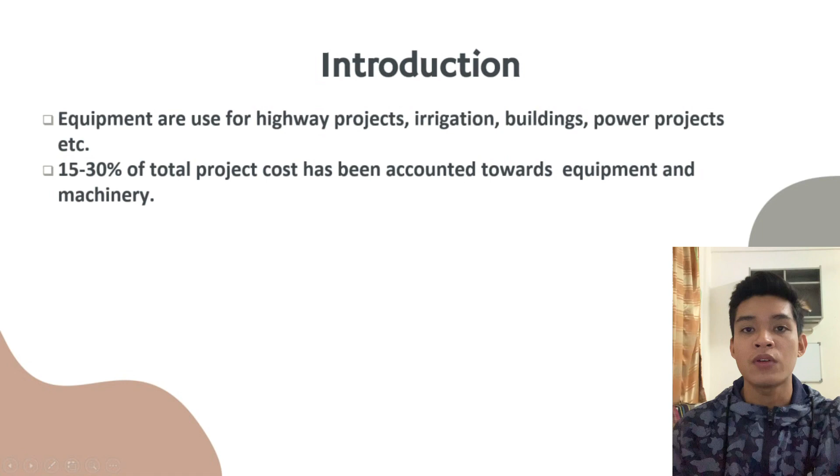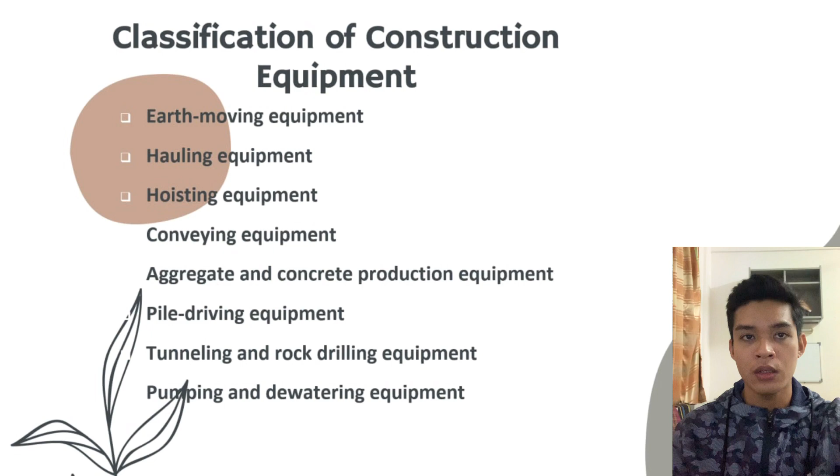It shows that the equipment used in construction must be sufficient and functional. The next slide is about the classification of construction equipment. There are several classifications that need to be focused on, such as earth moving equipment, hauling equipment, hoisting equipment, conveying equipment, aggregate and concrete production equipment, pile driving equipment, tunneling and rock drilling equipment, and pumping and dewatering equipment. All this equipment is very important in every construction.

There are some equipment that I will explain in more detail in the next slide. The first is earth compaction equipment. This equipment is also combined with sheep foot rollers.

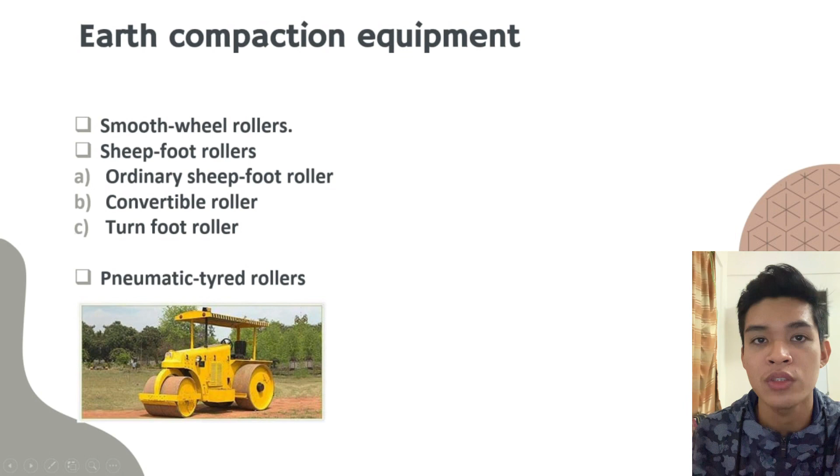Next is hauling equipment. The equipment used for transportation of material is known as hauling equipment, or simply haulers. Haulers may operate on the roadway and or railways. It also involves the transportation of building material, carriage and disposal of excavated earth, and haulage of heavy construction equipment.

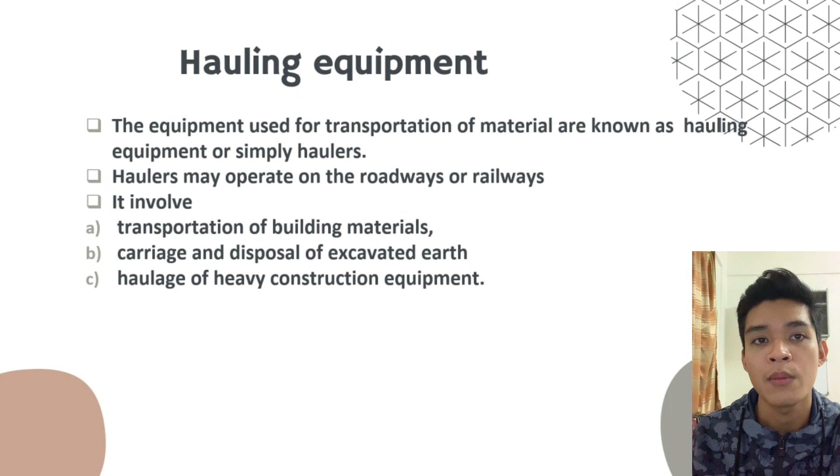Next is about hoisting equipment. Hoisting is the lifting of a load from one location and moving it to another location at a reasonable distance. This equipment is used in big projects such as construction of dams, industrial buildings, and more that require hoisting equipment.

This hoisting equipment includes jacks, winches, chain hoists, and cranes. A crane is the only single machine which, as a single piece, is capable of providing three-dimensional movement of a load.

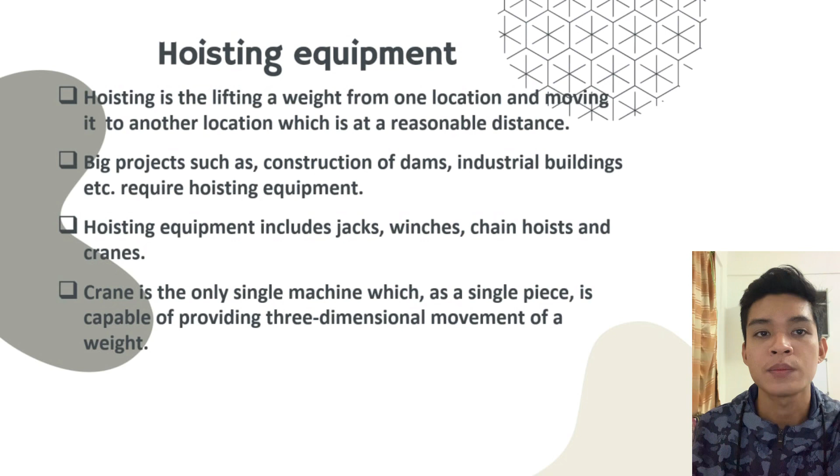Next is about conveying equipment, transporting material from one place to another over a stationary structure. It carries material in a continuous stream, with distinct features such as an endless chain or belt.

It can be done horizontally, vertically, or inclined. When the equipment does horizontal conveying, it is known as a conveyor, and when it does vertical, it is known as an elevator. Conveying is mainly used in mining, construction, and some other industries. In construction industries, conveyors are mainly used for concreting purposes.

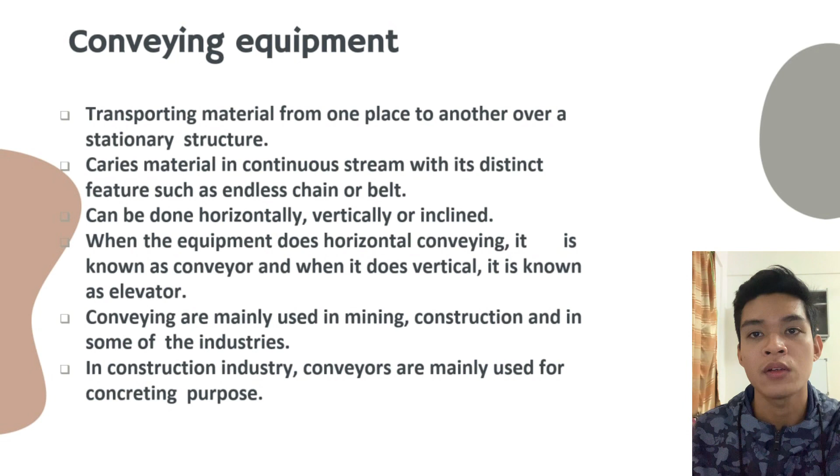Next slide is about aggregate and concrete production equipment. Aggregate has to be produced at the site if the quantity needed is very large. Therefore, in any project where concrete requirement is very high, an aggregate preparation and processing plant is essential to complete the concreting operation.

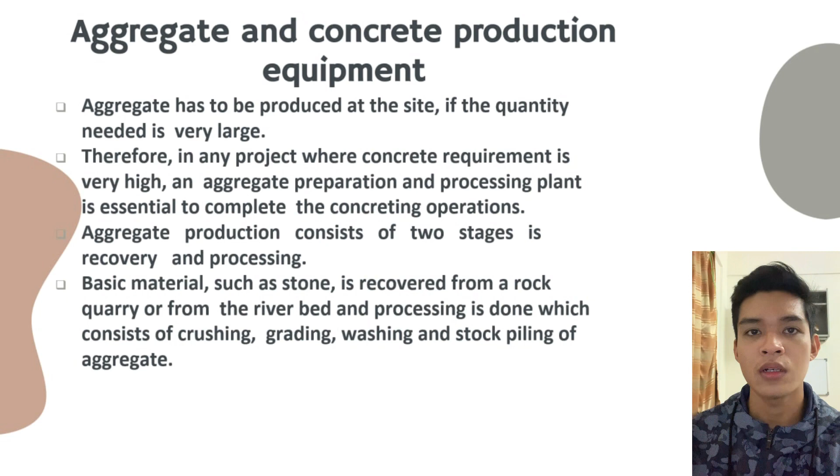Aggregate production consists of two stages: recovery and processing. Basic material such as stone is recovered from a rock quarry or from the river bed, and processing is done, which consists of crushing, grading, washing, and stockpiling of aggregate.